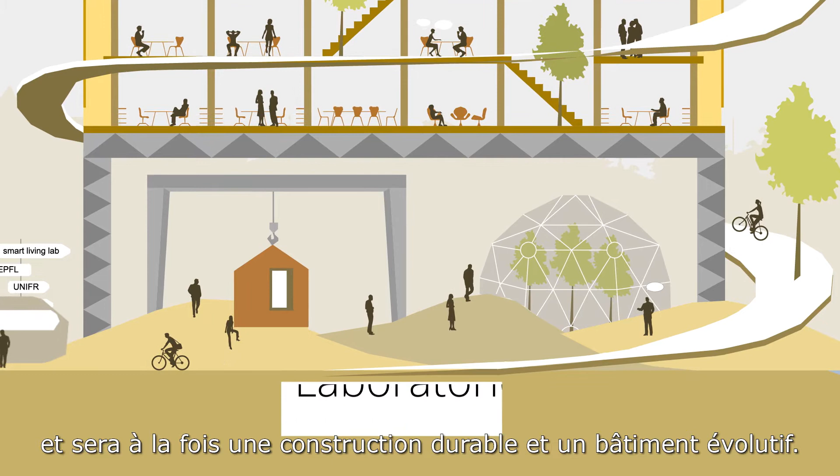This groundbreaking construction will be called the Smart Living Building and will be both a sustainable structure and an evolving building, consisting of laboratories and offices for some 100 researchers. It will also offer dwellings.

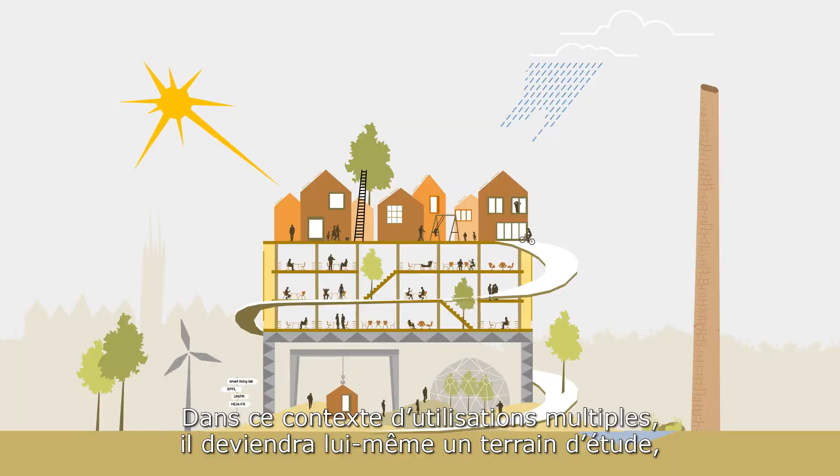In this multiple-use context, the building will become an experimental field of studies itself in order to find solutions to energy consumption and the greenhouse gas emissions that it generates.

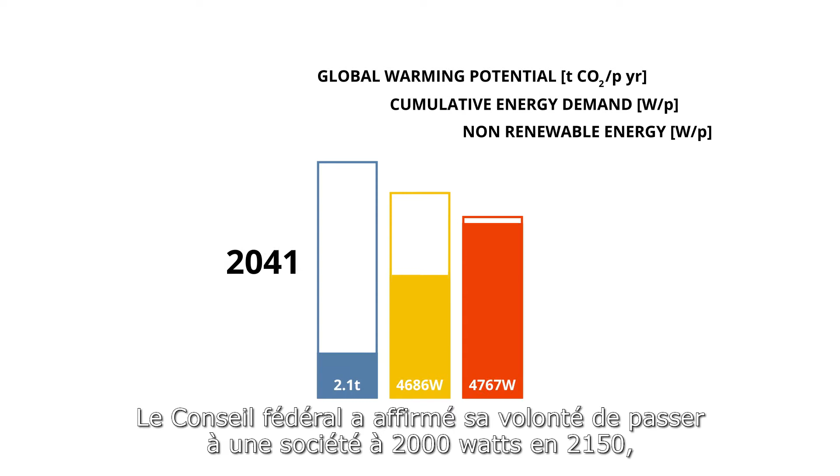The Swiss Federal Council has affirmed their will to move on to a 2,000-watt society by 2150, with a 3,500-watt intermediary stage in 2050. To allow the Smart Living Building to reach this goal, an interdisciplinary research program has been set up, financed by the state of Freiburg.

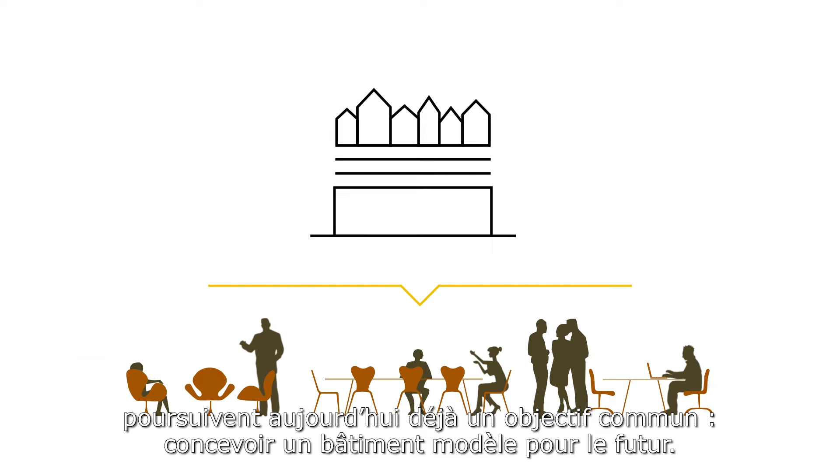Under the supervision of the Building 2050 Research Group, some 30 researchers from EPFL, HEIA-FR and Freiburg University are already pursuing a common goal: designing a model building for the future.

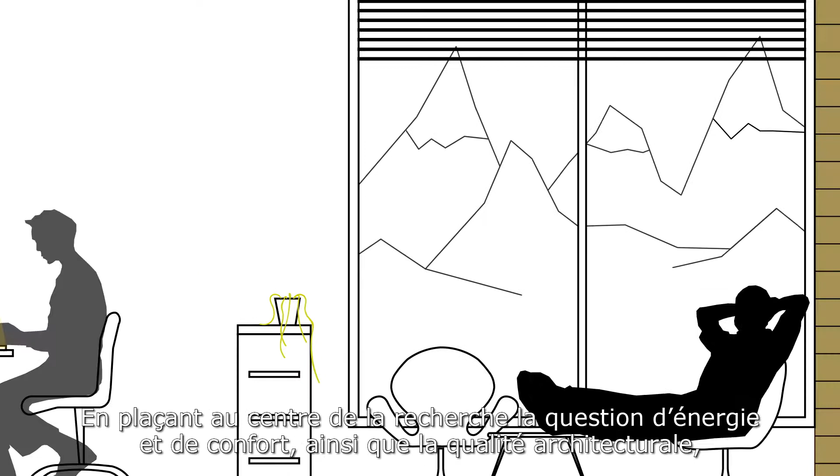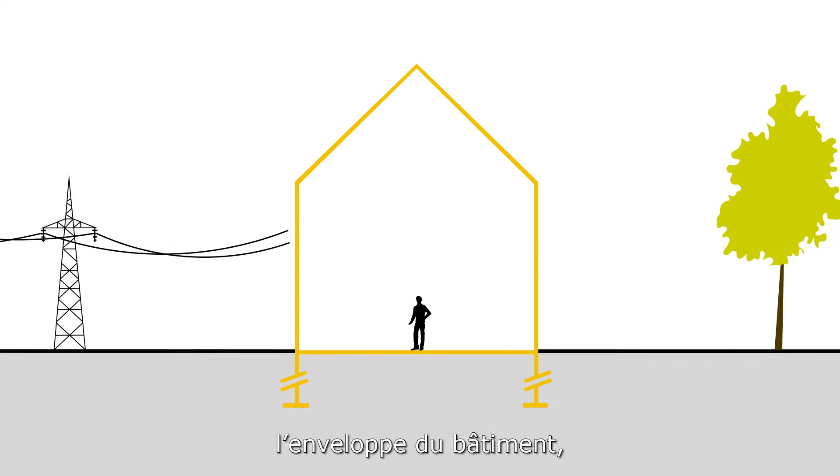By centering the research on the questions of energy and comfort, as well as architectural quality, researchers have identified 5 vital organs on which to work: the user, for whom the building is constructed; the building's envelope; local energy production or transformation; energy storage; and connection with mobility.

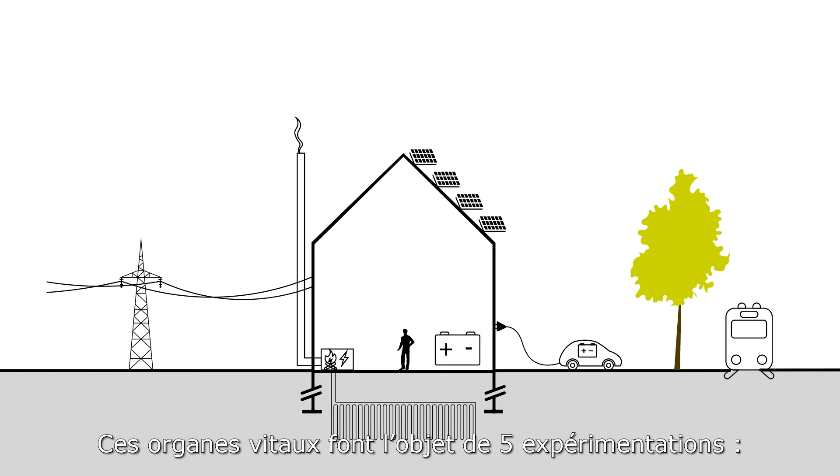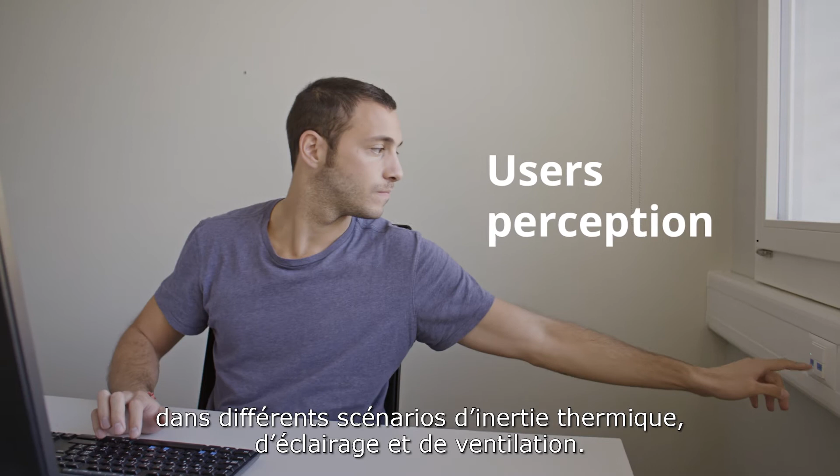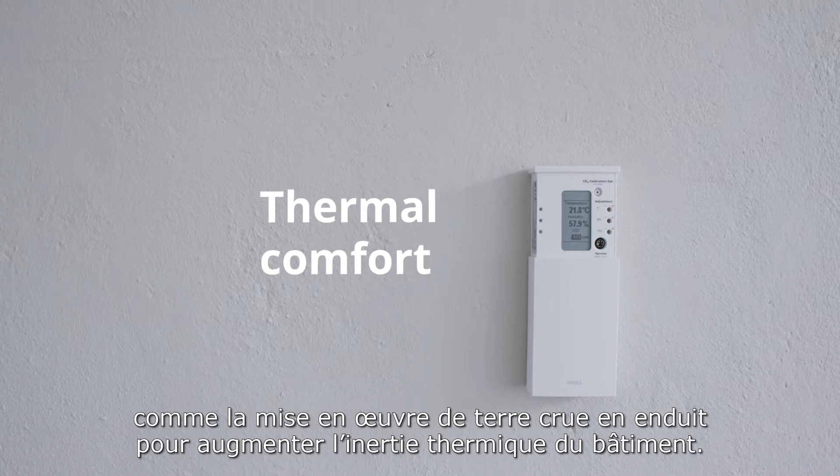These vital organs are subject to 5 experiments. This experiment will allow measuring the comfort felt by users, experimenting with different thermal inertia, lighting and ventilation scenarios. It allows, for instance, a better evaluation of bioclimatic strategies, such as implementation of rammed earth to increase the building's thermal inertia.

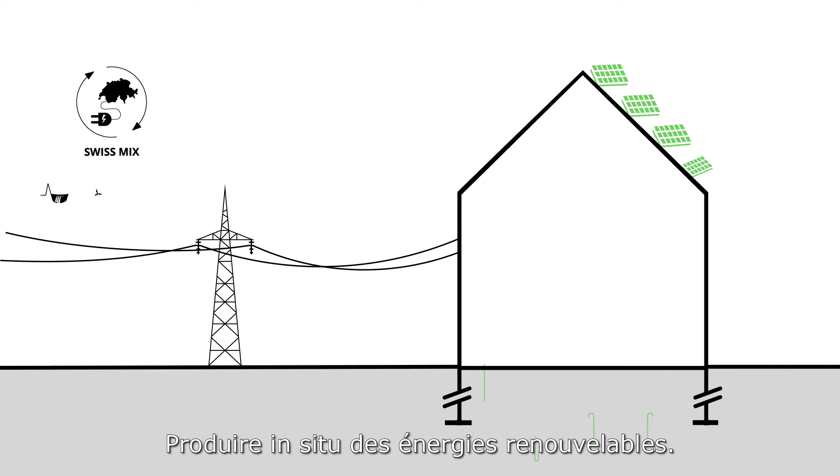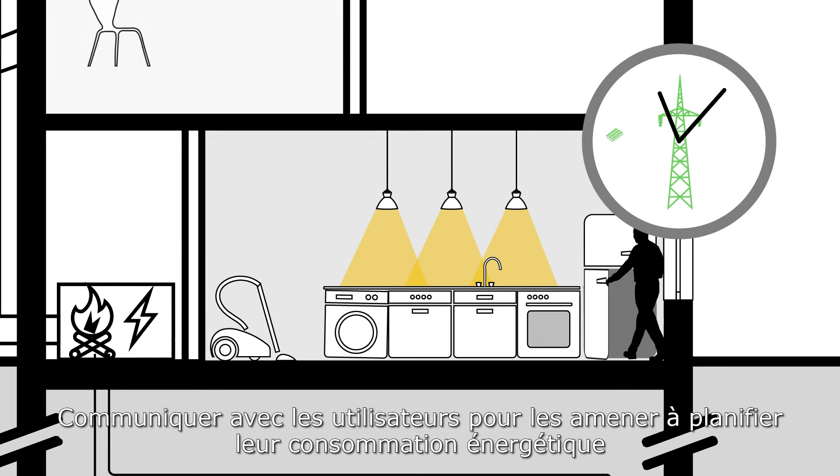The outcome sought here is to optimize the correlation between renewable energy availability and the building's energy demand by using the grid's energy at the moments when it's greener, producing renewable energy in situ, storing green energy to be able to use it when the grid is more CO2 charged, and communicating with users in order to encourage them to plan their energy consumption at the hours of greatest availability of renewable energy.

To reduce energy consumption and CO2 emissions, the aim is to obtain a stronger occupation density while satisfying the user's needs through partial desk sharing and by offering more common spaces. Through an increased intensity of use, the building's energy investment is thus more profitable.

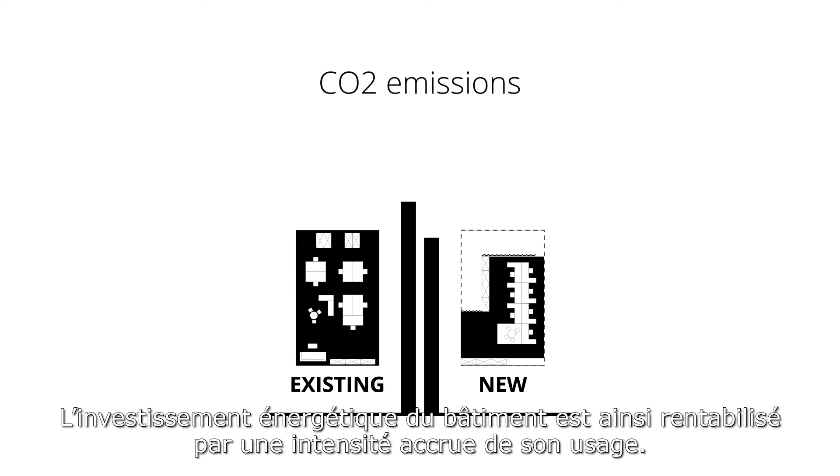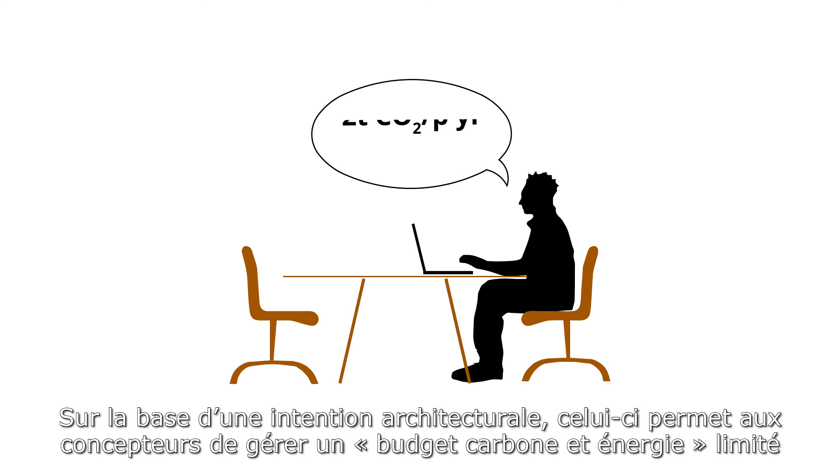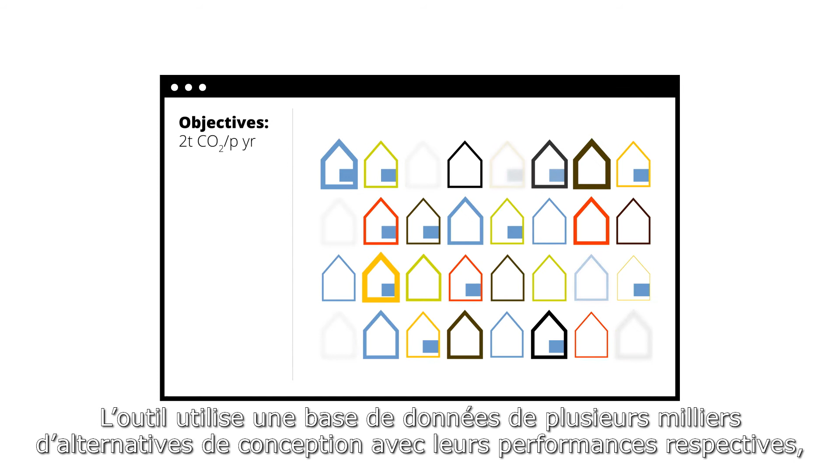The research group has also settled a design assistance tool called ELSA. On the basis of an architectural intention, it enables the designers to manage a limited carbon and energy budget enforced for the building's construction. The tool uses a database of several thousands of conception alternatives with their respective performances, allowing an early integration of energy parameters in the design process.

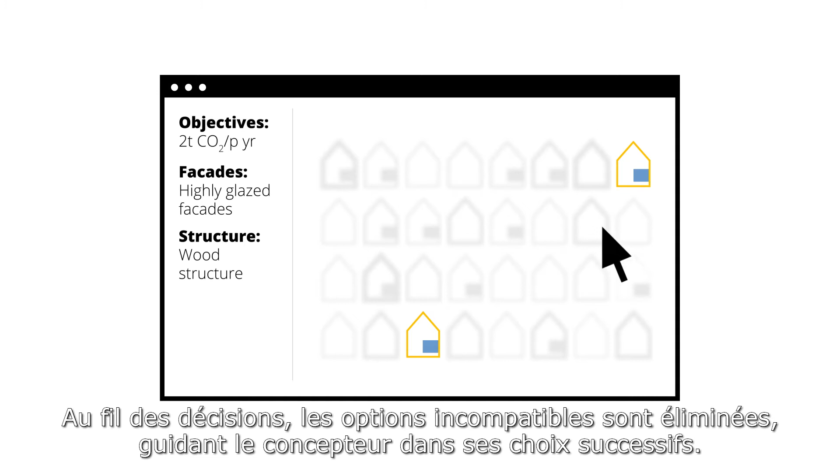Throughout the project materialization decisions, the incompatible options are eliminated, guiding the designer through his successive choices.

Interdisciplinarity and the experimental character of the project raise a parallel and reflexive approach, finding a common language for the whole chain of actors, from the researcher to the project owner. Which process will allow innovation, quality, but also performance? What roles and responsibilities must each of the stakeholders fulfill? These and other questions are to be answered by this experiment.

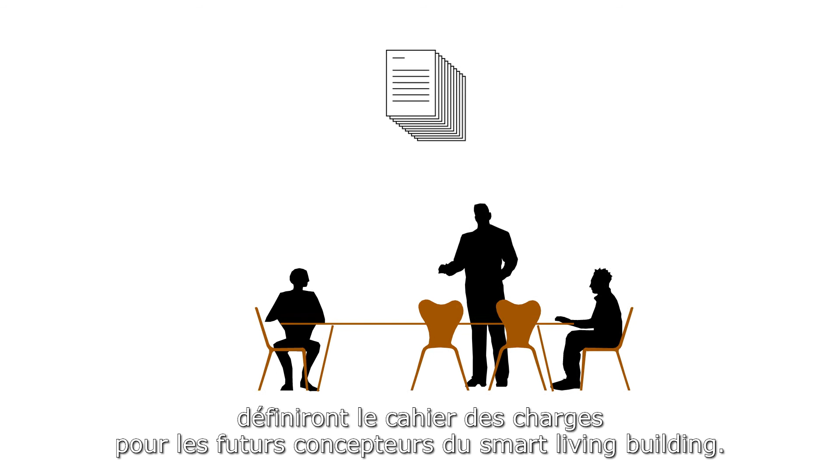These research studies, fed by the results of 2 workshops in 2015 and 2016, gathering international professionals and experts from the construction sector, will define the brief for the Smart Living Building's future designers.

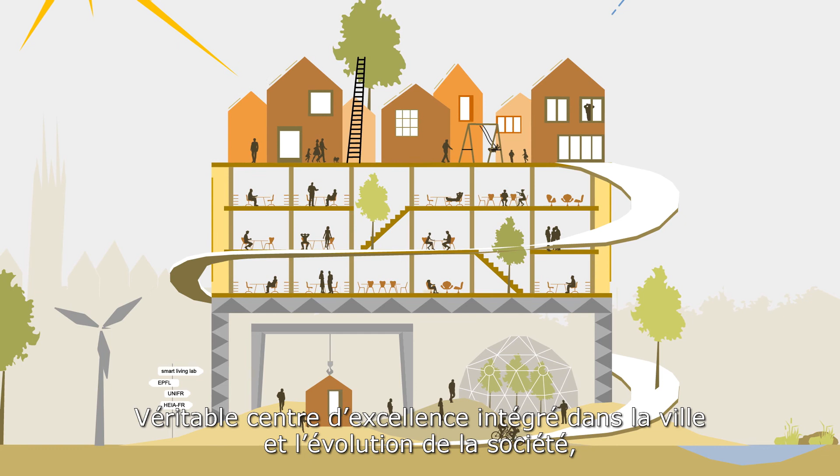The Smart Living Building, a construction integrated into the city and meant to be a part of society's evolution, will be a true excellence centre, allowing to experiment a new lifestyle 30 years ahead of its time.